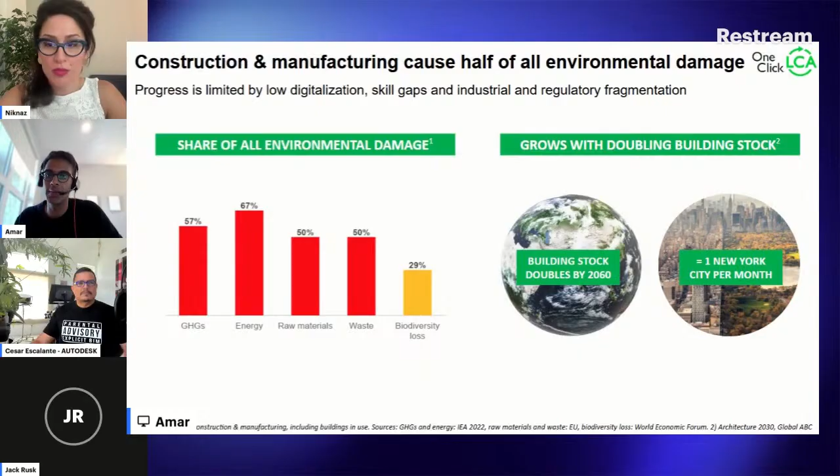Having said that, on the right you can see that we're not stopping building. We are in fact going to keep building a lot in the next decades to come. Which is why it's super critical that as an industry we look at things like life cycle assessments and sustainability evaluations, using all the tools that we have on the webinar today.

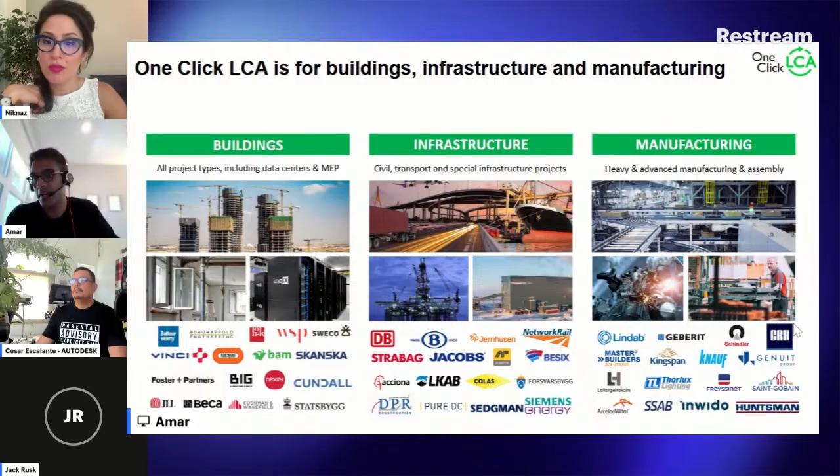A quick look at some of our clients. Like I mentioned, we work across both the architecture engineering side as well as the manufacturing side of things. You can see there's some typical names from these various industries that use One Click LCA in their everyday workflows in order to figure out what the environmental and carbon impacts of their products are, and then figuring out ways to reduce those impacts using the software.

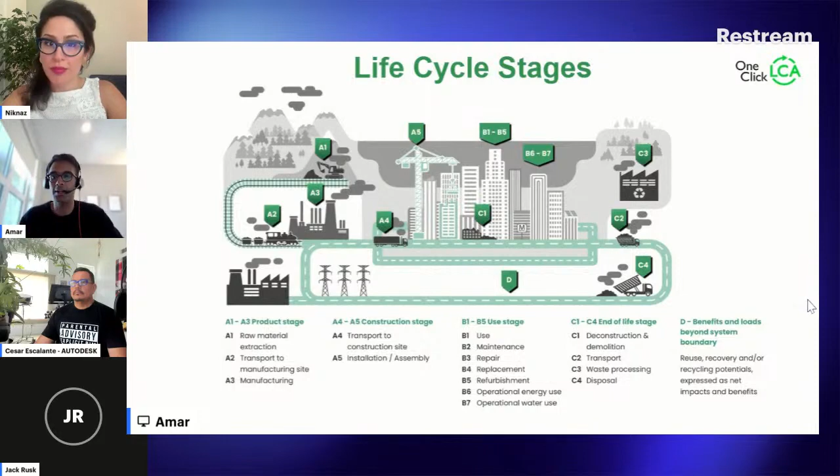So this is at the very base of it, what you're trying to do on the software when you are analyzing different kinds of projects. At the same time, building material manufacturers can go on the software and do this very exercise for their product. You can figure out, for this kind of concrete or steel or wood, what is the life cycle impact? Those numbers can then be used to figure out project level life cycle assessments. This is what ultimately the software is intended to do.

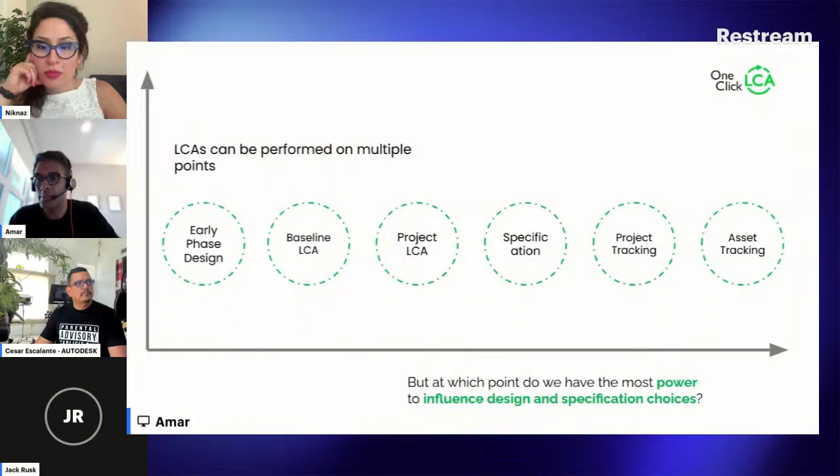This is like a general theme across today's talks: a lot of these evaluations can be done across various different stages of a design process of a project, whether it's early phase design, project stage, and then all the way to specification and documentation. You can do LCAs at various points. But the big question is, at which point do you have the power to influence design and specification choices using environmental data? That's where the graph becomes a little distorted.

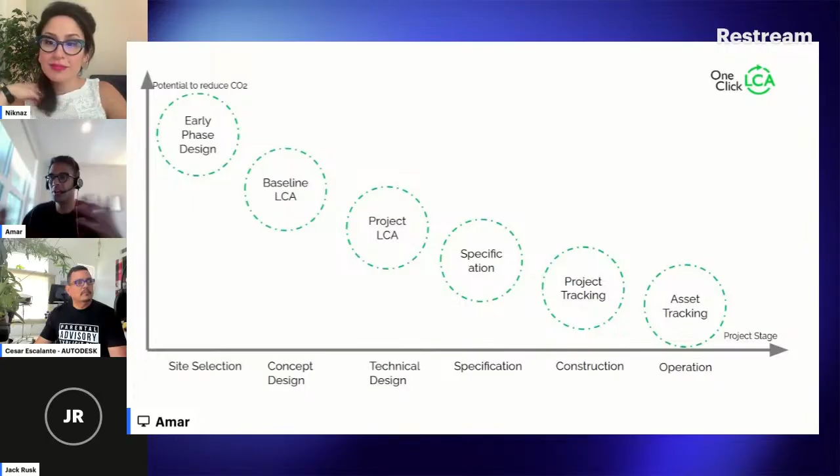You can see that the potential to reduce CO2 emissions at an early phase of a design is much higher during the site selection and conceptual design phase, as opposed to when you're at the construction stage, where it's not really possible for you to take decisions around changing certain materials or processes that we're using on the project.

The cost of making changes, like changing materials or design, generally increases exponentially relative to the time and effort already invested in the design. So not only does it have lower potential to reduce CO2 at a later stage of a project, but the cost of making that change is also very high.

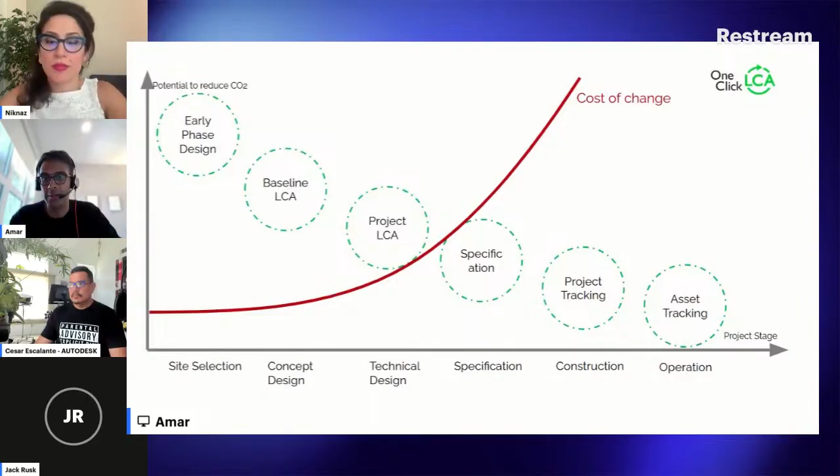So the highest potential always lies at an early stage of the design process, and that's very much the intention of the tool - that you're able to conduct LCA evaluations at any stage of your project, and then take them all the way to documentation and submission for necessary certifications and things like that.

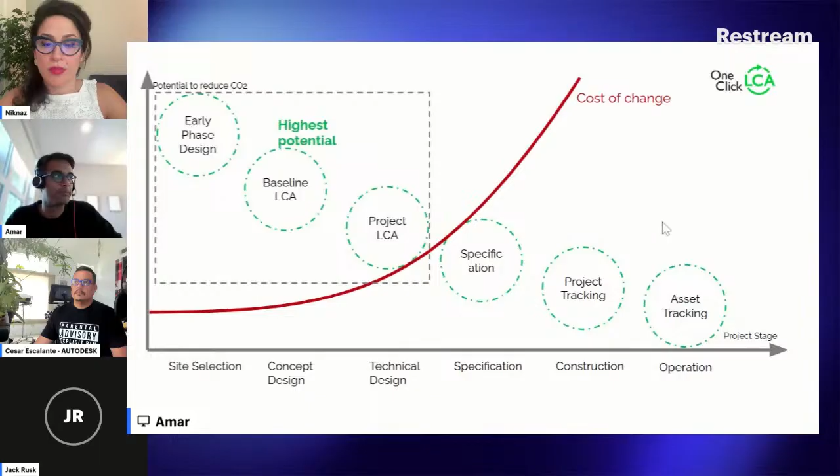As a side note, we talk to so many people in the industry, and sometimes it's hard for people to make sense of carbon numbers. You tell them this building will have X amount of carbon per square feet, and they say, okay, but what does that mean? Is it high? Is it low? Those are the kind of questions you can answer at this early stage, where you can see, conceptually speaking, on average, this building should have this much carbon per unit area, and compare it to the industry to see if it's lower or more.

So you could find things like that, and probably at an early stage you're able to find, okay, the amount of carbon looks very high. How do we reduce it?

And then as you move forward with your design process, during the design stage, One Click integrates with Autodesk Revit - you can even upload your bill of materials - and many other design tools, like IES and several other early stage design modeling tools. You can use One Click LCA plugins to get all that design data into the tool and conduct the lifecycle assessments. Towards the later stages of the design process, you're able to analyze and create final reports and use those for your submittals.

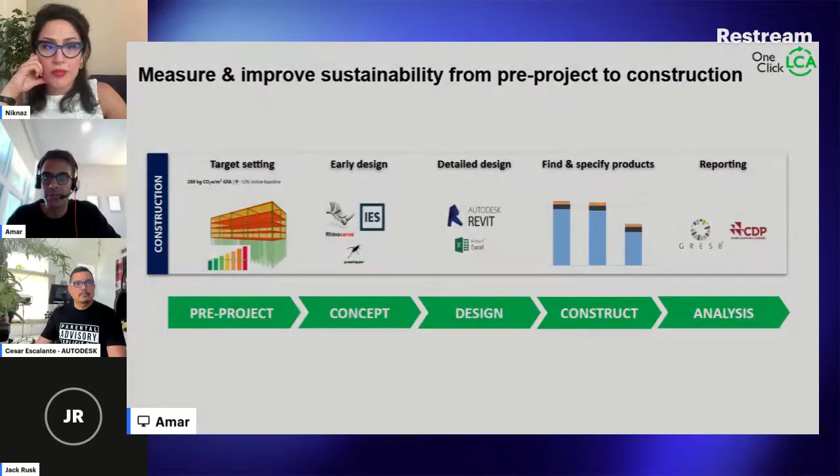Similar to construction, we also work with manufacturers of building materials, and they also go through a few stages in order to create EPDs, or Environmental Product Declarations, for their products.

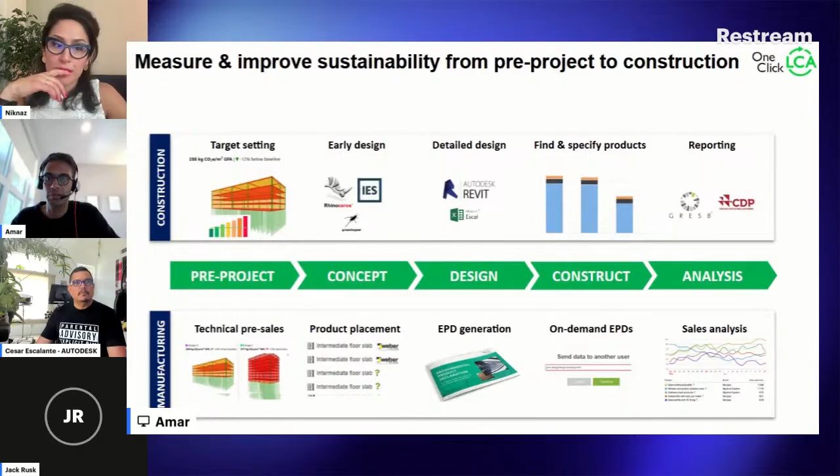As a tool, we understand that being able to do environmental evaluations, LCAs and EPDs, has a few barriers to adoption. Typically, you could categorize those barriers under four categories.

Firstly, the amount of LCA data that's out there in the world, and being able to find the right data point to use for your project's materials and various processes, can get terribly complex - which is the second point: complexity, finding the right data, finding the right calculation methodology, and things like that to have a comprehensive analysis.

And then the workload - the sheer amount of effort it might take someone to do all this manually, going one by one on each data point, can be quite laborious, and it's almost like a research project in itself.

Lastly, there are the various standards that exist in the market. LCAs have to be ISO compliant, and certain things need to be ensured for an LCA to be completely verified. So these are the four big challenges we see in the market, and as a tool, our aim is to have all these challenges solved on the platform.

So once you start using One Click LCA, you know for sure it's compliant with specific standards. You get all possible LCA databases on the tool that you can potentially use for your projects. And it reduces workloads because of all the various automations and capabilities within the tool to automatically take your designs and conduct these evaluations on the back end.

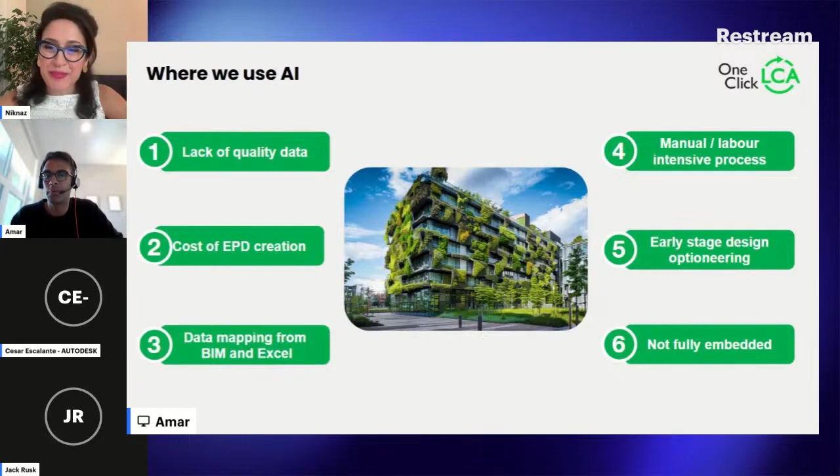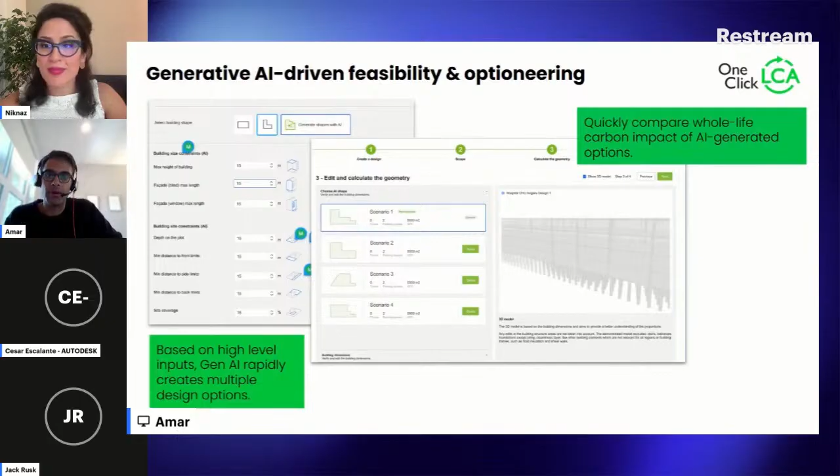Yeah, perfect. I'll go through these quickly. These are just screenshots of the things I've been talking about, and if anyone's interested, feel free to reach out separately and we can go over it in much more detail with a demo. This is a screenshot from an early stage showing AI-generated optionalities that you can generate on the software.

Even searching for materials — for example, this is very naive, but in a way it's saying find me a low carbon concrete in California. Now it's possible to have much more accurate results for something like that, based on your location, your specification, and the type of material you're looking for, rather than just a general result of a bunch of materials in your area.

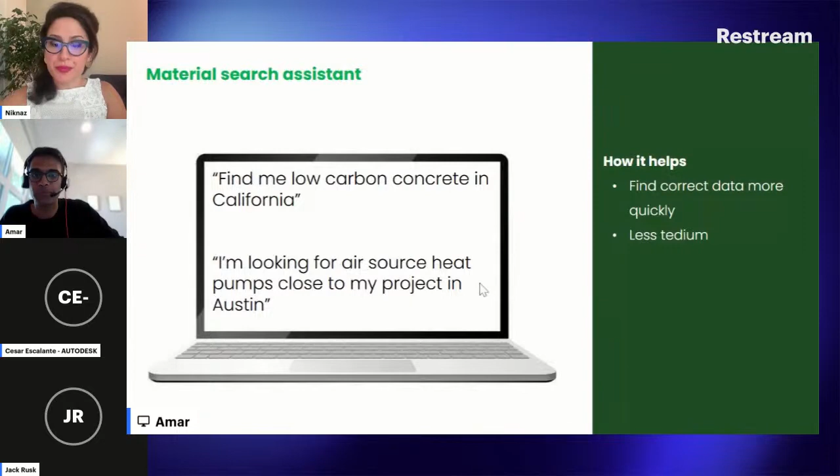Lastly, I'll leave everyone with this. There are many case studies you can find on the One Click LCA website, but a couple I have screenshots of here: Ha/f Climate Design, based in Canada, did a project in Toronto and were able to lower embodied carbon by a significant amount. There were a few strategies, which you can also find on our website, on what kind of interventions they did for this specific project to reduce embodied carbon.

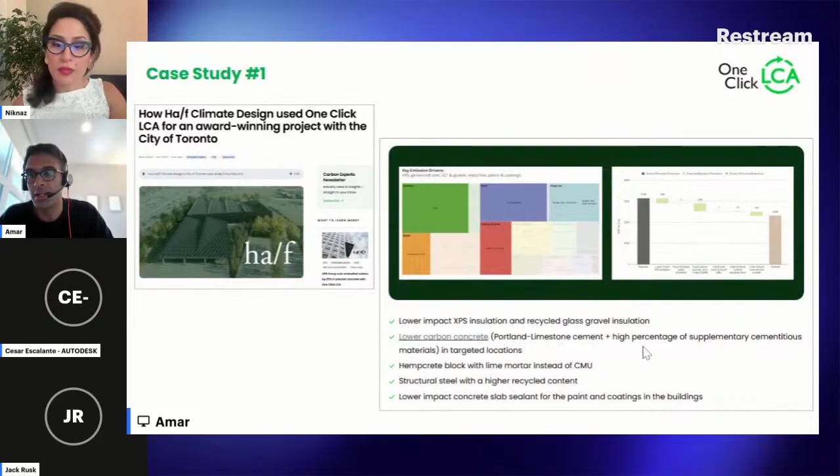There are lower concrete carbon typologies that they used, and hempcrete blocks used instead of CMU, etc. I won't go through all of them, but it's an excellent case study of how people use tools like ours to achieve these outcomes. Similarly, the Arcadis infrastructure project also achieved a 30% carbon reduction, following some specific strategies.